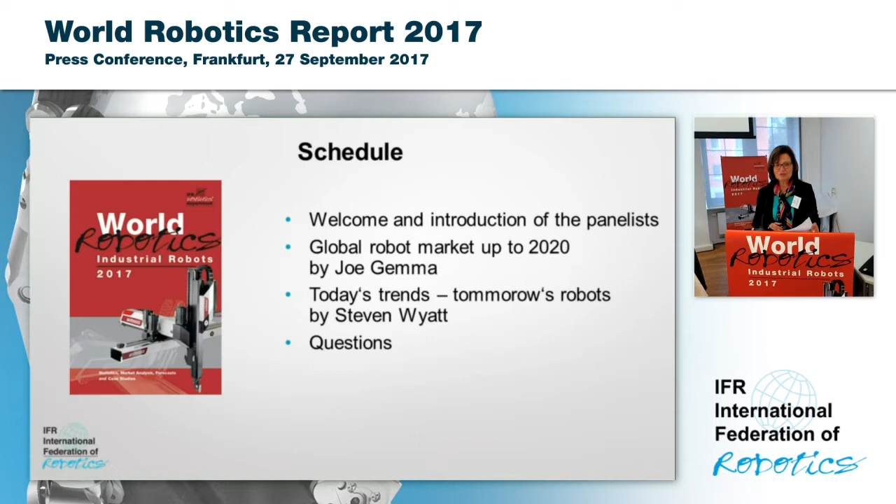I will present you first of all the schedule of this event. After the introduction of the panelists, Gemma will report on the global robot market up to 2020, and afterwards Wyatt will inform you about the latest trends in the robotics industry. And then you will have the time to put your questions to all the panelists.

Just a few words on the International Federation of Robotics. We had a turnover in 2016 of 40 billion US dollars. We have more than 50 members: national robot associations, robot suppliers, robot integrators, as well as research institutes and universities. We are the sponsor of the oldest robotics conference, the International Symposium on Robotics, which will take place next time in June at the Automatica in Munich. And we are co-sponsor of the IERA Award, which honors inventions in robotics that are already commercialized on the market. And we are the primary source of worldwide data on the robotics market.

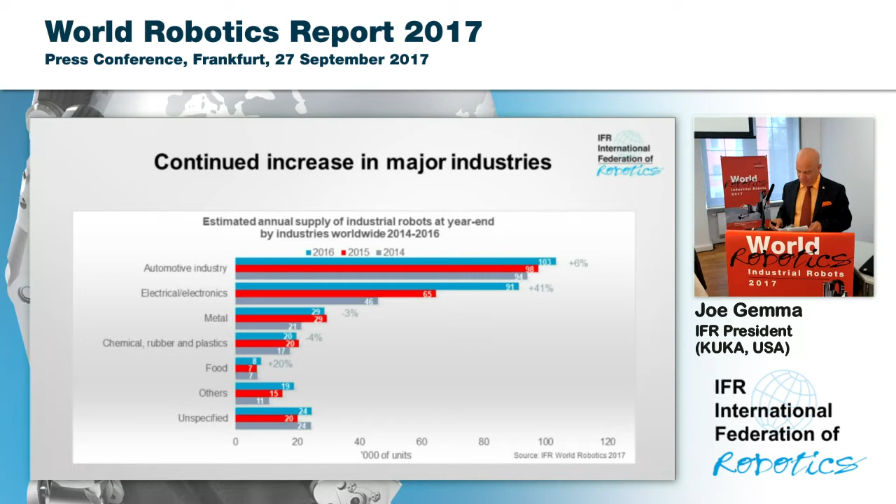Asia, and we talk a lot about Asia, so certainly we saw the strongest growth in Asia across the world, and that is led by China. In 2017, the robot installations in the Asian and Australian region are expected to grow 21%, but not alone. The Americas are expected to grow in 2017 at 16%, and Europe is also expected to grow approximately 8% in 2017. Some of the important drivers to that are robot adoption, more acceptance of robots, and responding to faster business cycles and greater variety of products driven by consumer demand, in multiple sectors.

So we're seeing other areas growing in other markets. From 2018 to 2020, we expect an average annual growth in Asia of approximately 15%, in Europe approximately 11%, and in America 15%. I think it's interesting to note that by 2020, Asia will be more than double both America and Europe combined.

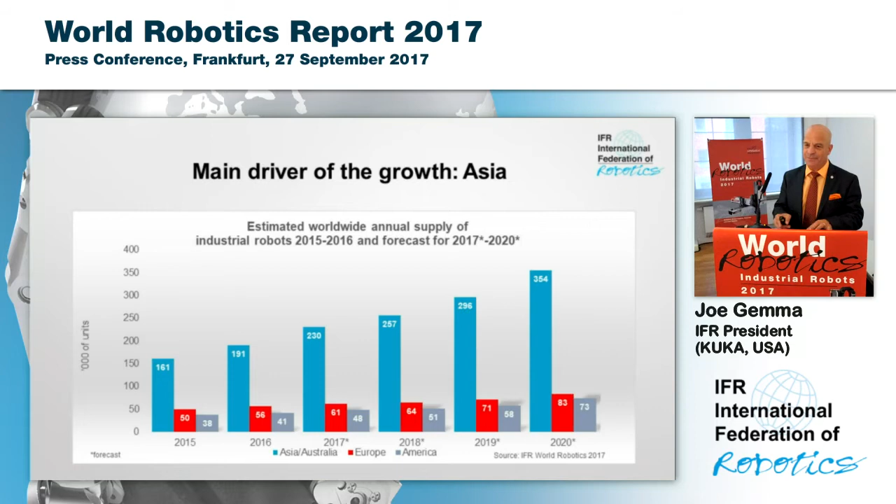The market is across multiple countries, as you can see by this chart. However, 5 areas dominate that with 74%. As you can see, the top 5 are China, Republic of Korea, Japan, United States, and Germany. China significantly expanded its leading position as the biggest market in the world, approximately 30% of the total in 2016, which equated to 87,000 industrial robots, twice the next biggest market.

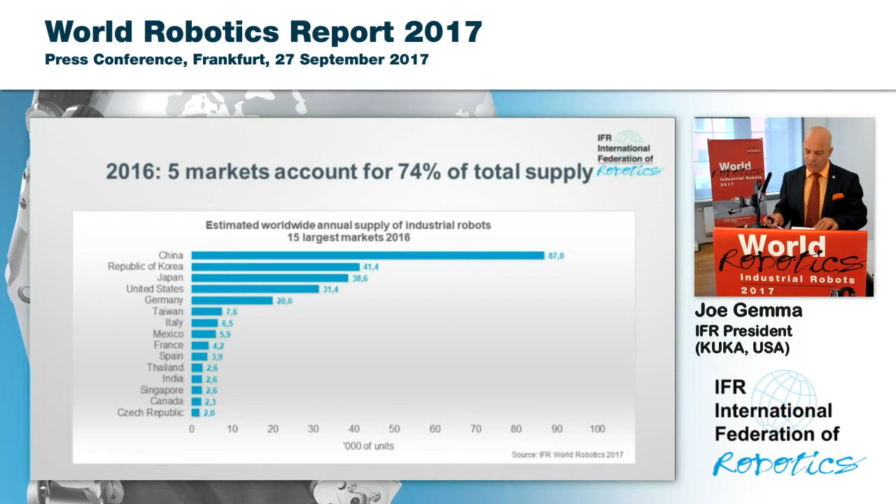And consider in 2009, there were about 60,000 industrial robots globally, and 87,000 alone in China last year. Again, the others that I mentioned, Korea, Japan, the US, and Germany combined are 44% of the total supply of the world market. So that, along with China, is 74% of the Asia-dominated total.

That growth we expect to continue right through to 2020, and we expect by 2020 that China will have 40% of the global supply in the market. China's domestic robot suppliers continue to expand in their home market. As of 2016, 31% of the robots installed in China were domestic suppliers. China intends to forge ahead and move into the top 10 of the world's most intensely automated nations in 2020.

That market offers a huge potential for a variety of robot installations in the future across a variety of market areas. As previously mentioned, we expect double-digit growth. In 2017 alone, we expect 32% growth in China, and from 2018 to 2020, an average growth between 20 and 25%.

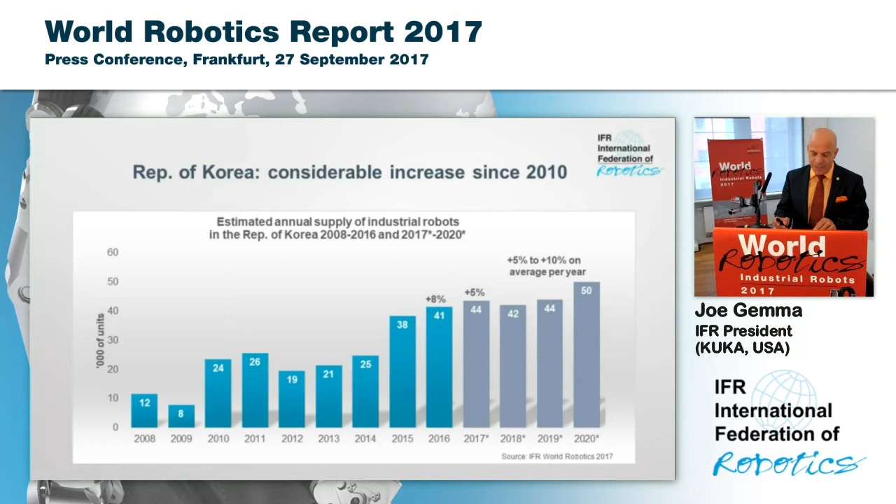The next market, as I said, the largest, is Korea now, the Republic of Korea being the second largest market. It's seen major investments in the electronics industry, considerably since 2010, in fact - twice as much compared between 2012 and 2016. South Korea has the highest level of robot density in the world, with 631 robots per 10,000 employees in manufacturing as of 2016. The country is the market leader in LCD and memory chip manufacturing, which embraces automation technologies for effectiveness in that market space. It will continue with large projects planned in both the electronics and automotive industries in the near future. We expect an average 5 to 10% growth over the next 4-year period, 2017 to 2020.

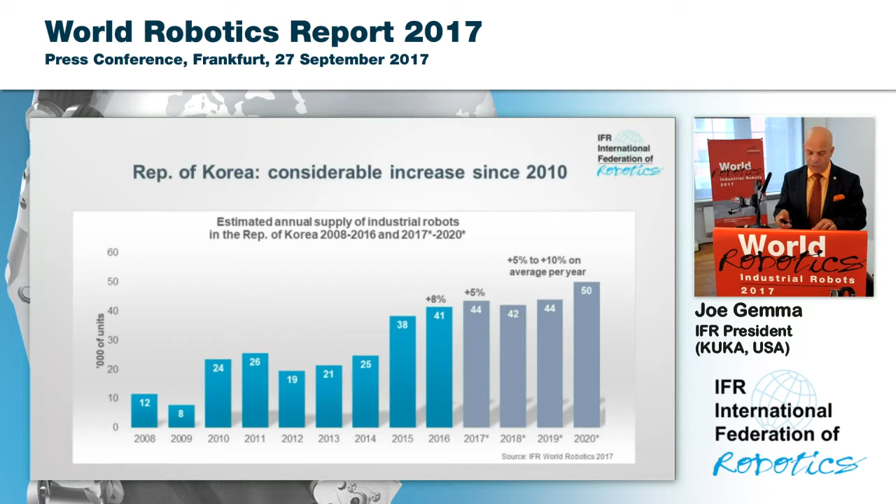Japan has rebounded, with 35% growth from 2013 to 2016. In 2016 it saw 10% growth over 2015, up to 38,600 units - the highest since 2006, which was 37,400.

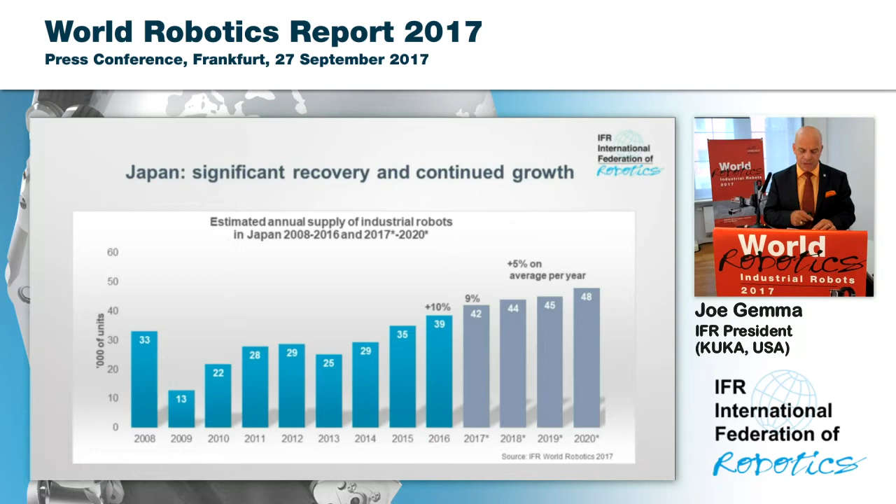Japan continues to be the dominant robot manufacturing country. Since 2010, production has doubled to 152,000 units in 2016, driven by replacement, new materials, new production processes, and increased capacity requirements in the electronics industry, and this will result in considerable worldwide sales going forward. Japan has their own project called Japan's Robot Strategy, which will further stimulate growth there and certainly support it abroad. In 2017, we expect further growth at 9%, and then through 2018 to 2020, a pace of an average of 5% per year.

The USA in 2016 set another record, and you can see from 2010, more than 100% growth. In 2016, with 14% growth, it brought the total to a peak of 31,400 robots. Domestically, the trend to automate, allowing for the strengthening of American industries to compete in the global market, is affecting the installation of robots in a positive way.

We expect 15% growth on average from 2017 through 2020. The automotive industry is certainly a major player - in fact, the automotive OEMs and suppliers continue to be the driver of automation technologies in the US and North America, with approximately 75% of the market there being automotive and automotive suppliers. However, the electronics market is gaining there also, especially with Foxconn's LCD display manufacturing plans leading the way.

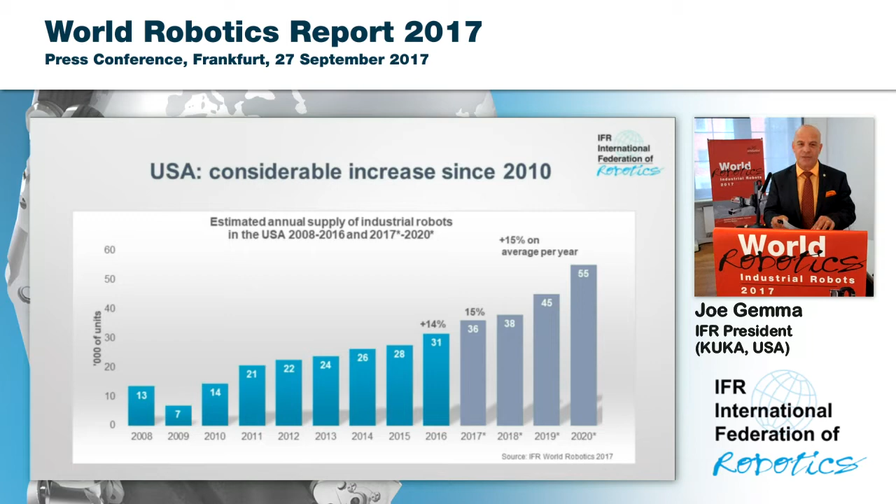Germany, a very stable market, and in fact the automation engine of the European community. It is, in fact, #2 in robot density in the world, with just over 300 robots per 10,000 manufacturing employees. Germany did see a slight increase in 2016 to just around 20,000 robots. We at the IFR still see an opportunity for growth there, and expect from 2017 to 2020 an average of 5% growth per year. The majority of that coming from the general industry and the automotive industries.

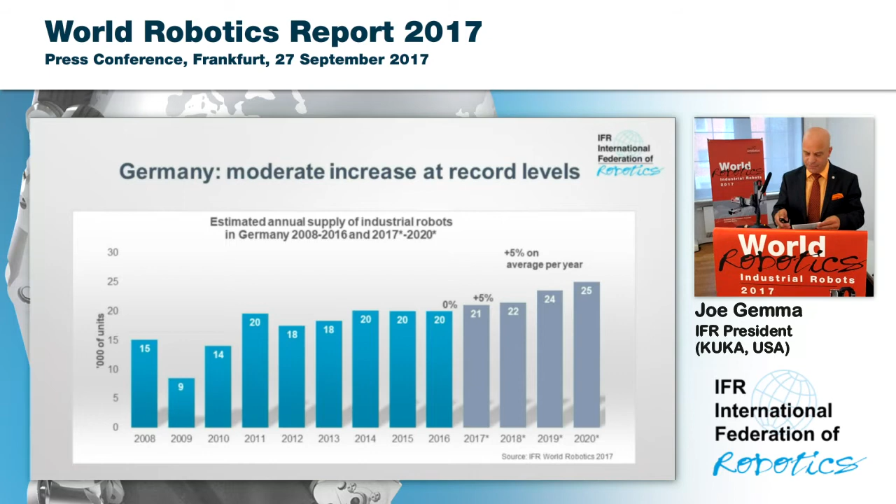By 2020, and that's part of our job, to give you a view of the future, we expect there'll be 3 million robots in operation across the world. That estimate goes from just over 1.8 million in 2016 to over 3 million by 2020. This will be due to an average growth of 14% per year, year to year, over that period.

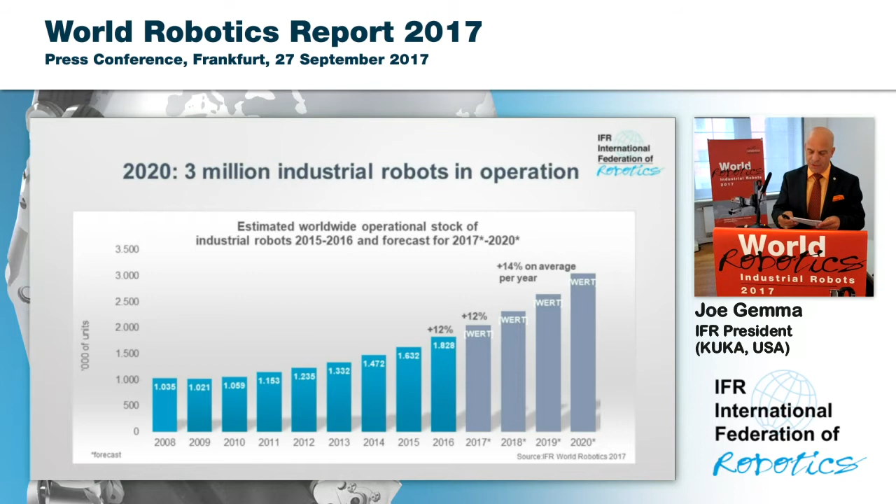In 2020, of that 3 million I just spoke of, there'll be 1.9 million in the Asian Australian markets. And that will account for an even bigger majority - in 2016, already 56%, with a 16% increase in operational stock. Some of the growth drivers beyond the countries already mentioned are Taiwan, India, Vietnam, and other Southeast Asian countries. The 2020 expectation of 1.9 million in operation in that region is almost equal to what the total current operational stock is in the world today.

In 2017, we also expect an increase of 9% in America, with Mexico emerging and adding more value from an automation perspective. And finally, about a 7% increase in Europe due to significant contributions from Central and Eastern Europe, and certainly some of the traditional markets in that area.

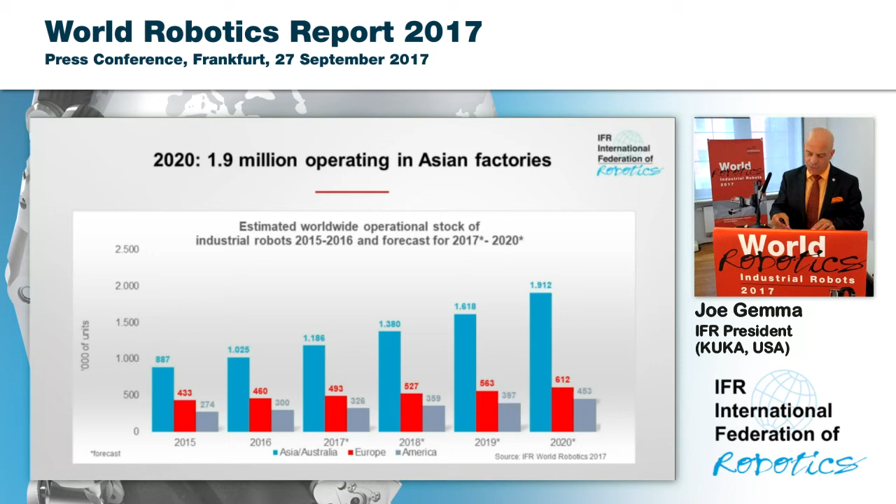I mentioned Japan because Japan, up until 2015, was the largest operational stock in the world, although that does continue to grow in that area, also in Japan.

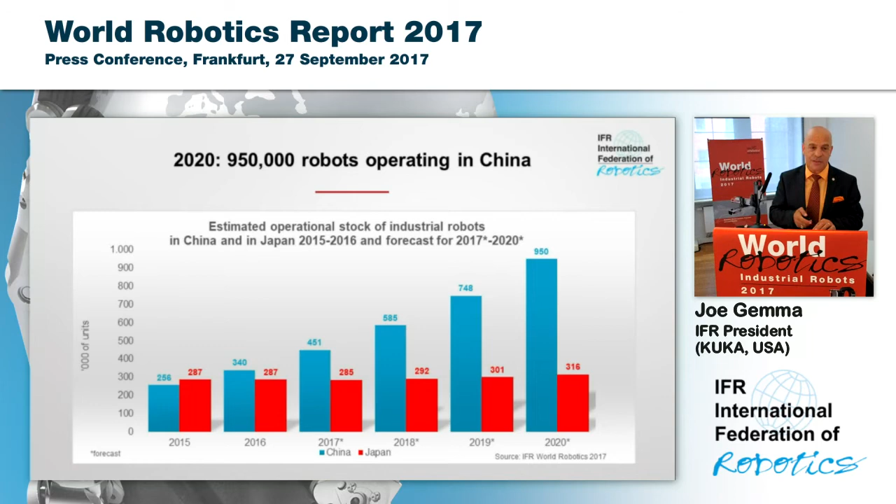I mentioned robot density in a couple of my previous comments. Robot density globally continues to increase, and Korea by far is the highest. I mentioned earlier 631 is double the next closest country, which is Germany, and then right behind that, Japan. Robot density in China is the most dynamic due to the rapid growth we've seen in recent years, still below the global average of 74 per 10,000 manufacturing employees.

China particularly saw some significant growth in the period of 2013 to 2016, where it went from 25 robots per 10,000 to 68 per 10,000. USA also saw some significant increase, especially since 2010, and went from 114 robots per 10,000 workers to 189 robots per 10,000 workers in 2016. In addition, France, Taiwan, and Spain also saw some marked increase in that period.

Some of the trends that Steve will be talking a little bit about is Industry 4.0, where we expect to play a bigger role, as well as machine learning, AI, and collaborative mobility. Simplification of programming, ease of use strategies will drive more acceptance and more new applications. Robots offering precision, connectivity will play a key role in digital manufacturing of the future and smart manufacturing, with increased availability and affordable costs that enable more manufacturing companies of all sizes and all sectors to automate.

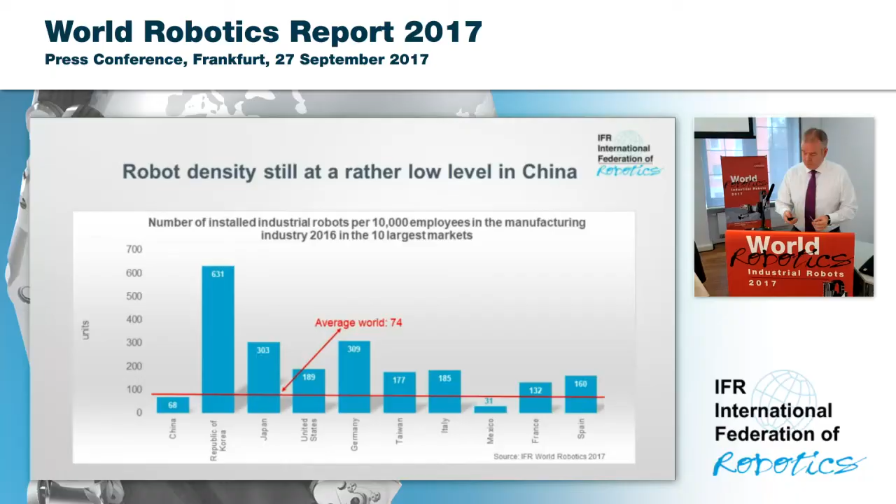What I would actually like to do is try to complement what Joe has talked about, primarily around the statistics, give you a little bit of a feel for some of the trends that we see going on in the marketplace and what that potentially implies in terms of what robots in the future will look like, and also what robots will actually have to do.

So if I start with what I typically refer to as the changing nature of manufacturing and work, I think in order to understand what it is that robots will potentially do, or what they will do in the future, we first have to look at what is the environment in which they operate, and what are the changes that are actually taking place there.

If I was to highlight a couple of factors that are rather critical here, one is the fact that actually, due to all of you in this room today and all of you attending virtually, there is a fundamental change taking place in manufacturing from what I call high volume and low mix to low volume and high mix. The fact that none of you sitting next to one another want the same thing as the person sitting next to you. But the one thing you do have in common is you all want it now. And that drives a fundamental change in the infrastructure of manufacturing, which has really been set up to produce an awful lot of a very limited number of things.

One of the other things that is actually changing is there continues to be and will continue to be an acute shortage of skilled labor. If we take Japan, that Joe mentioned as one of the main countries in robotics, one of the historical drivers, 20% of the current labor force in Japan today will retire within the next decade. And that will bring also about fundamental change in the manufacturing setup of that country.

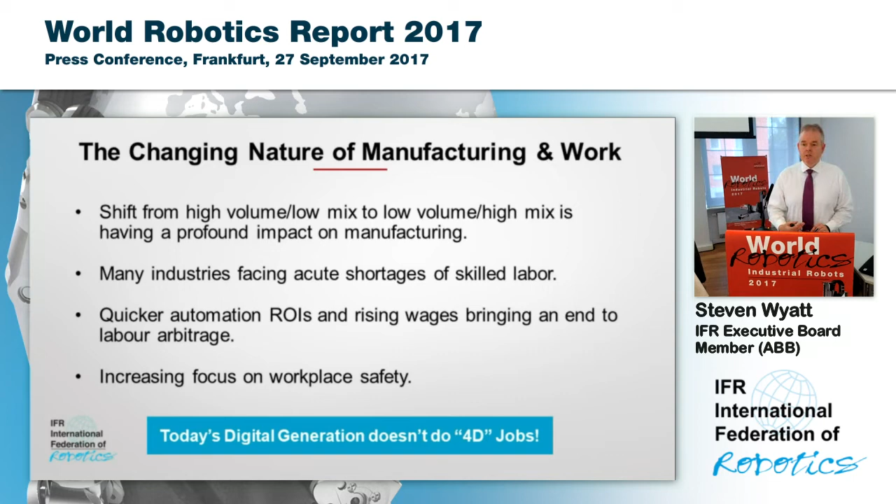Maybe all of this is underpinned by what I refer to as the digital generation, or maybe the millennials if they want. Millennials actually don't want to do the same type of jobs that the baby boomers, who are currently setting off into the sunset and their well-deserved pensions, were happy to do. They do not like what I often refer to as these 4D tasks - things that are dangerous, delicate, dirty, and dull. Those are not things they aspire to. They want to do more meaningful work, and they are much more interested in being able to use their cognitive skills and not do the types of dangerous, delicate, dirty, and dull things that a robot can actually do.

So if I try to put this into something maybe a little bit more scientific, we have a lot of engineers within our members, so I try to put it into a form that hopefully everyone can relate to. Here I try to take some of these trends that I've mentioned, then move into some of the challenges this represents for our industry. And then if I look at what I call the enablers, I try to address some of the things many members are working on with great creativity in order to unlock what is really a huge opportunity for us in the market.

If I pick one of these examples, you'll be happy to hear I'm not planning to go through everything, but if I can pick this example of SMEs, these small, medium enterprises. Actually SMEs make up 99% of the companies in the EU and the US, and they account for 2/3 of the jobs in the private sector.

But actually, if we're brutally honest with ourselves, they struggle to deploy our robots. They find them a little bit too complex and difficult to use. Bear in mind, these are typically companies with 1 or 2 employees, anything from machine shops to butchers to bakers. They have a lot of competence, but not typically with robots.

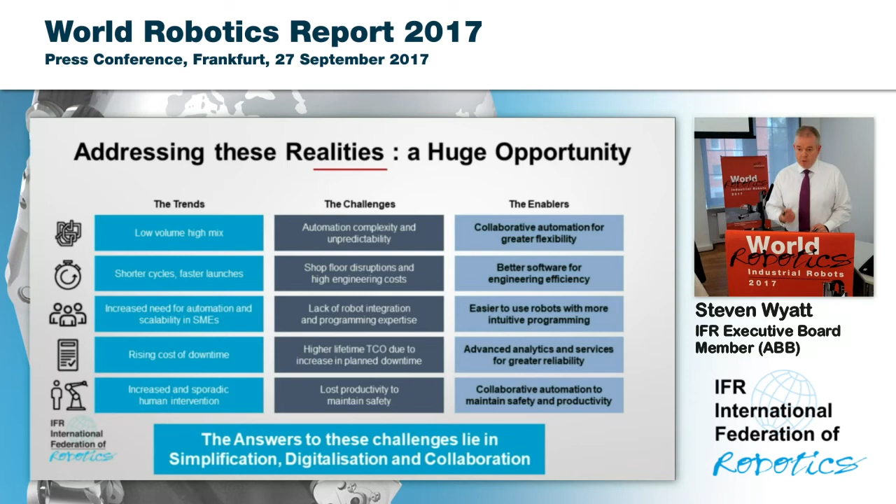Now, if I try to summarize that example on SMEs, as well as some of the other examples you see on the sheet, I would say you can categorize, bucketize, whichever word you like, into what I often refer to as simplification, digitalization, and collaboration. So if I may, I'll give a couple of examples of what that looks like in practice for people in the robotics industry, and bring some concrete examples of how we see that transitioning into practice.

So simplification. Traditionally, and even today, robots are programmed, and they're typically programmed with proprietary programming languages. Today, however, we're actually able to start teaching robots using something many of us would refer to as lead-through programming. The example here being that if you have a robotic arm attached to a tablet, for example, you take the robot and lead it through the steps it needs to do: move from position 0 to position 1, collect object A, move to position 2.

So every time you hit one of those points, you simply click on your tablet, it will record it, and at the end you hit save, and hit go, and the robot will run the routine you saved in the tablet. So we're managing to take robots from programming into lead-through, and then ultimately, moving forward, robots will also be able to set themselves up and optimize themselves. So there's an example of simplification that I hope you can see relates to a small medium enterprise, where that company will have very limited capability in terms of robot technology.

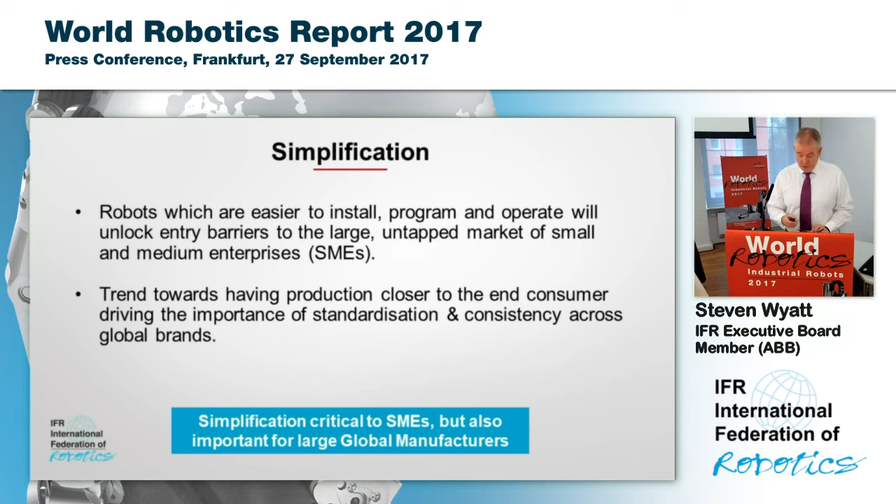The consequence of that is they end up with many more locations. We have many customers among their members that are 300, 400 locations across the globe, and they desperately need a simple, standardized solution so that when they produce the same product across the globe, what the consumer ends up with will be exactly the same. You need the same quality and consistency so that the brand, whether you buy it in Brazil or Indonesia, you see exactly the same thing. So simplification is important to different categories of companies that use robots, but it is not interpreted or required in the same way.

If I move on to digitalization, I'm sure you're probably even much more familiar than me with a whole slew of terms used to describe this, anything from Industry 4.0 here in Germany to the Industrial Internet of Things and many other terms to boot. I would say what this is really about is taking the connectivity that we all take for granted in our pockets, in our handbags, in our homes, and actually moving it into the industrial world to make our professional lives in industrial locations much more simple.

If you look at what happens today and what will happen moving forward, this will be very much enabled by vision and sensing technology, some of it coming from the gaming and mobile phone industry that has been adapted to the robotics industry. That will enable us to collect data, which then via analytics we'll be able to use to improve the operations and efficiency of our operations in factories.

It will also help us develop new business models. For example, a lot of these sensors that collect data, with the analytics we're able to run on that data, we'll be able to look at condition monitoring—the health of the factories that are running—as well as predictive maintenance, trying to figure out at what point it actually makes sense to carry out maintenance, rather than just looking at the normal annual shutdowns traditionally run by companies. That in itself will help increase the uptime, efficiency, and productivity of industrial locations and companies.

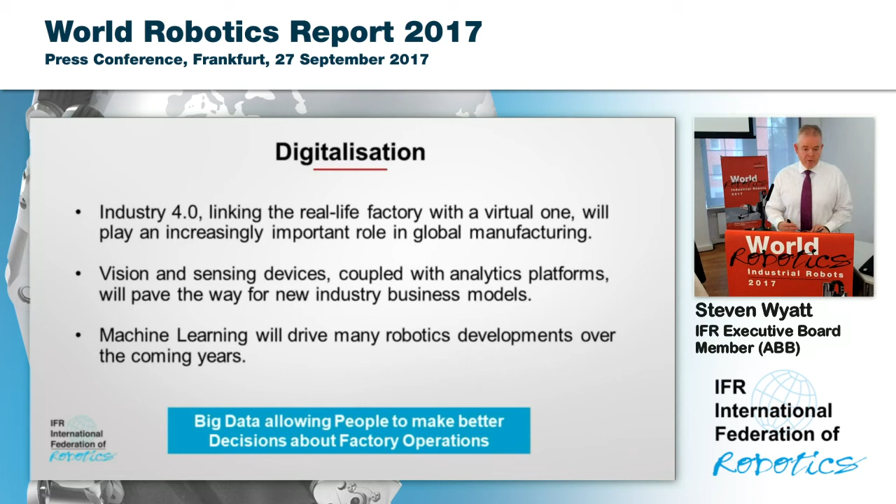One thing I'd also like to underline at this point, Joe mentioned it too: machine learning. It's a term that can mean different things to different people, but fundamentally machine learning will be at the center of a lot of things robotics will see in the coming years. I'll give you some examples later of how we see that actually running. This itself will also be enabled by things you're also familiar with by now—cloud platforms, big data analytics, and such like.

Last but not least, if I move to the third bucket, the one I refer to as collaboration. Since so-called collaborative robots burst onto the scene a few years ago, I think a lot of us in the industry, and certainly here at IFR, have learned that they actually mean different things to different people. For some people, it's about what I think the initial concept was meant to be: robots that are actually able to work safely together with people without the requirement to be behind a fence or a cage.

There are other people who simply look at it as something that's easily programmed, easily installed. Yet others, such as my favorite SMEs, don't require a robot that does the same thing 24/7—they consider collaborative robots as something relatively easy to redeploy, so they can do one thing with the robot in the morning and potentially use it to do something else in the afternoon. The one thing we can say, however, is that for the first time we have robots and machines able to collaborate, robots and humans able to collaborate together safely.

It has opened up a whole number of options for manufacturing, how we think about it, how we potentially design for manufacturing. As Joe mentioned earlier, it is an area that is developing quickly and will continue to move forward at great pace in our industry.

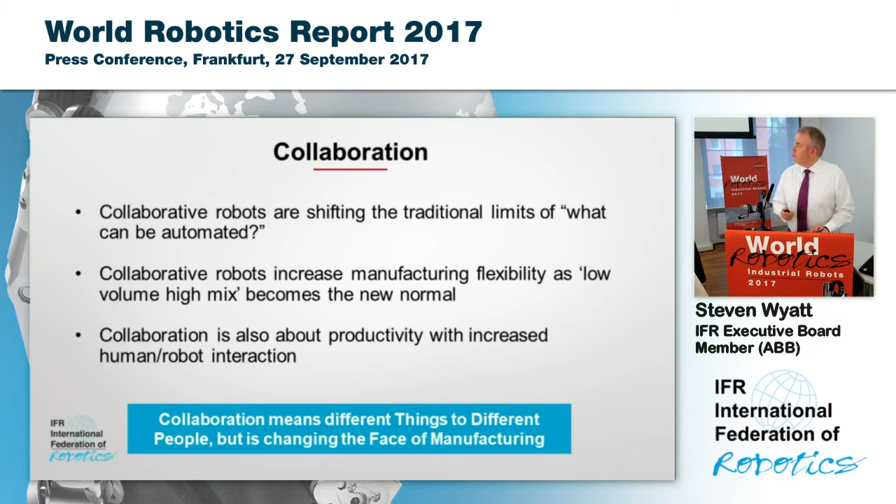In trying to conclude, what I'd like to do here is give two examples of how you can potentially try to see these things in practice. My first example I call self-optimizing production—this is something for the factory managers of this world. This relates to a scenario where a company has 10 or 15 locations throughout the world, and they have a common operation, let's call it palletizing. We have a robot that's part of a palletizing cell putting bags onto a pallet and packing them up.

One of the challenges people have today is it's very difficult for them to see how these palletizers are performing in different parts of the world, to understand if there are any differences, and also what we can do about that, how we can optimize it.

Through a combination of connectivity and machine learning, we have the capability to connect all these things to a network. If you're an SME, you may not have a network, but if you're a large company, you probably do, and you can connect all these robots. At the click of a button, I can see exactly how my palletizer in Sao Paulo, Brazil is doing, how that compares to the one in Memphis, Tennessee, or the one in Jakarta, Indonesia.

With the data that I generate, I can use it so that the robots that are not doing so well, but performing the same task in a different location, can learn from the others in order to increase the overall efficiency and productivity of my factory. These are things that were not possible in the analog world, but will be very possible in the digital world. In fact, they're already starting to happen today.

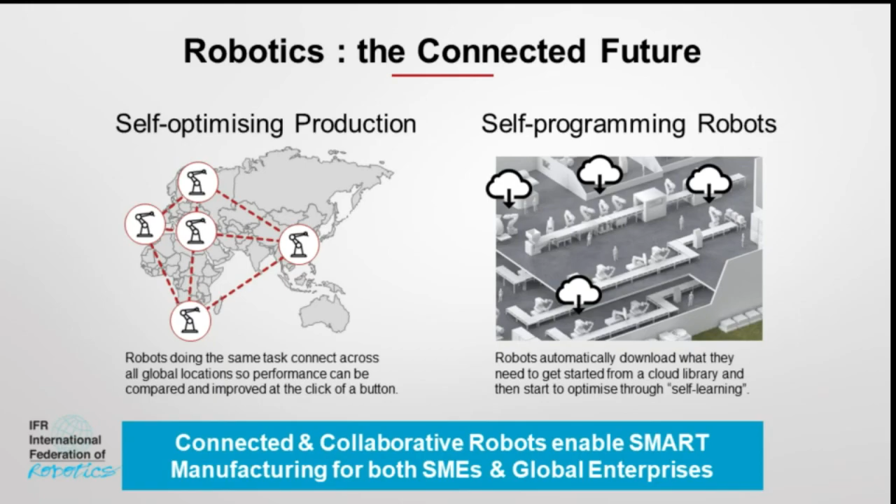So those are a couple of examples of things that are either happening now or will be happening in the near future. I would be lying if I said these are happening every day in every single factory across the world. But that's one of the reasons why I'm so passionate about robotics and confident about the future—because if you look at the nice growth numbers that Joe presented today, none of these things I talk about here are included in any significant way in those numbers. These are all things where we only just start to scratch the surface.

It's actually one of the reasons why myself, my colleagues, and our members are very enthusiastic and feel that the future for robotics—the best is yet to come.